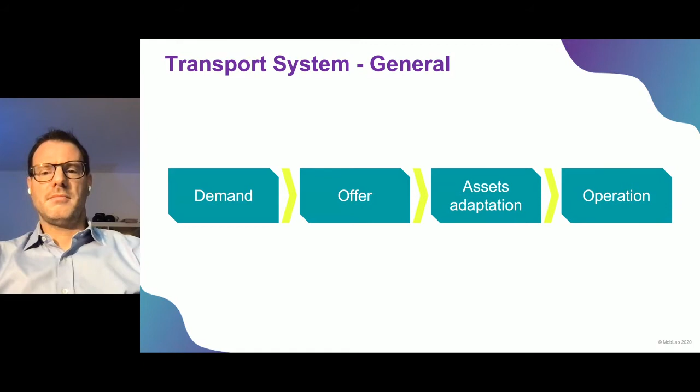Transport system in general, we have a demand - somebody wants to travel. The operator makes an offer. We adapt our assets if necessary, and we go into operation. Pretty simple. However...

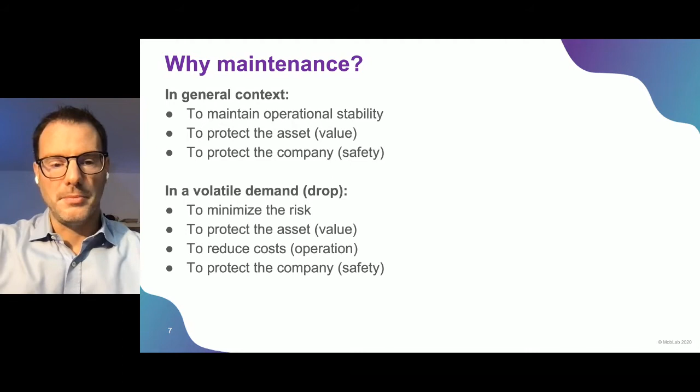Why do we do maintenance? Basically, in general context, to maintain operational stability, to protect the asset, to protect the company on the safety side. At the same time, we have to minimize the risk in a volatile demand, or we have to protect the asset and reduce cost on the operation side if we have a drop in demand, to protect the company as well on the safety side.

The Swiss public transportation - we can go almost anywhere from anywhere at almost every time in one click. All schedules are coordinated. It doesn't matter if you travel by bus, by boat, by tram, or by train. Aviation is not considered part of the public transportation, but the cooperation, feeder, and reciprocal importance of both systems are widely recognized.

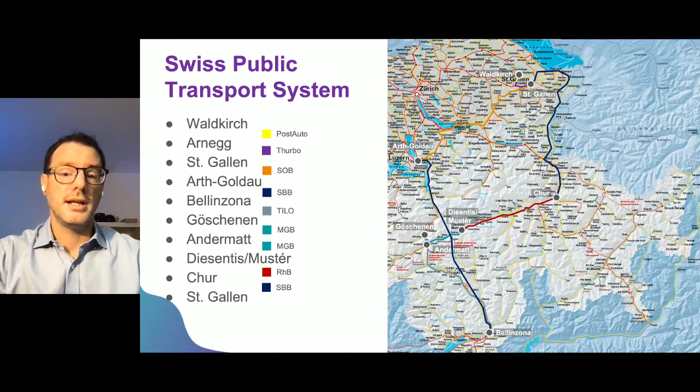Bus operator, Postauto, SOB, SBB, Tilo, which is normal gauge railways, and Matterhorn Gotthard Bahn, Rätische Bahn, which is narrow gauge railways, and again SBB. This basically in one single click gets you your way to travel.

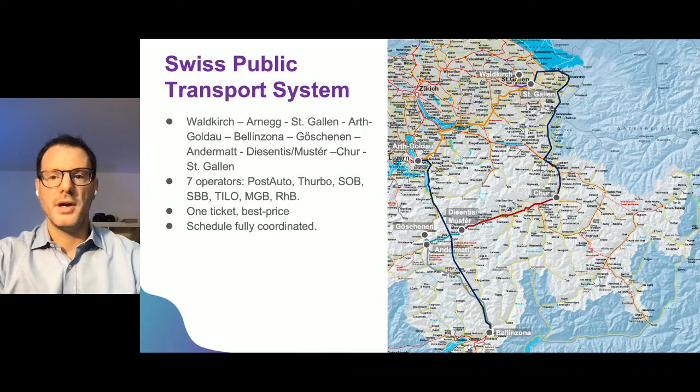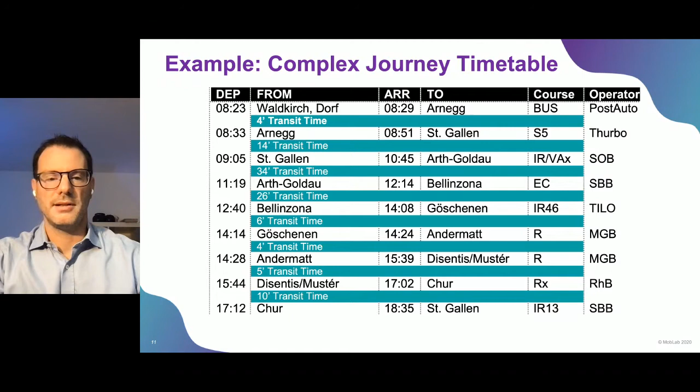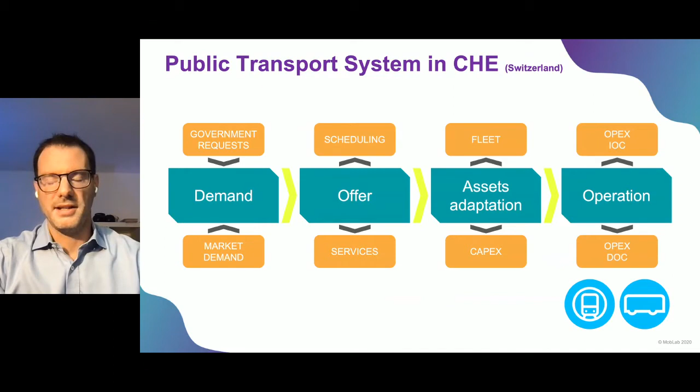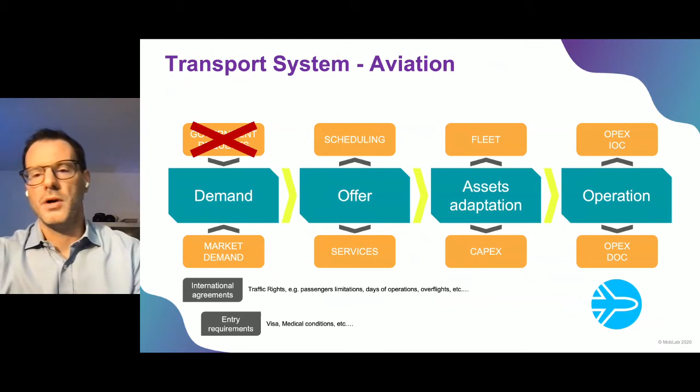The difference between public transportation and aviation is pretty simple. You don't have any government request. The market is fully privatized. You have international agreements, and you have entry requirements, which is now one of the biggest problems in aviation.

Then it picked up again, and we had the financial crisis in 2008. We have a slight drop and then a continuous increase up to last year, or let's say two years ago, to 58 million. What is the situation now?

We are back to 17 million, which means we are back 33 years. In 1987, we had more or less the same amount of passengers.

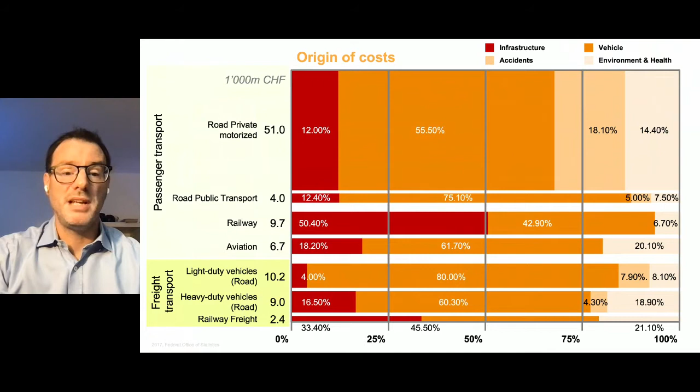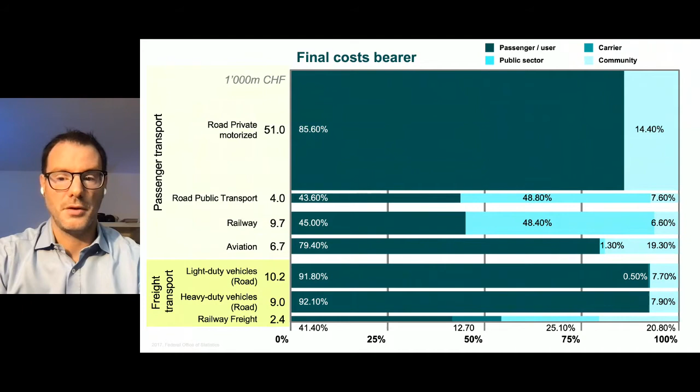We have about 14 billion for public transportation and 7 billion for aviation. Due to the fact that public transportation is subsidized, 50% is covered by the state and the rest is covered by the users. On the other side, aviation has almost no subsidy, 1.3%.

On the public transportation side, you have basically urban and regional which are subsidized, and the long distance which is self-supporting. As I mentioned, the real big drop - the only thing you can do is reduce operation.

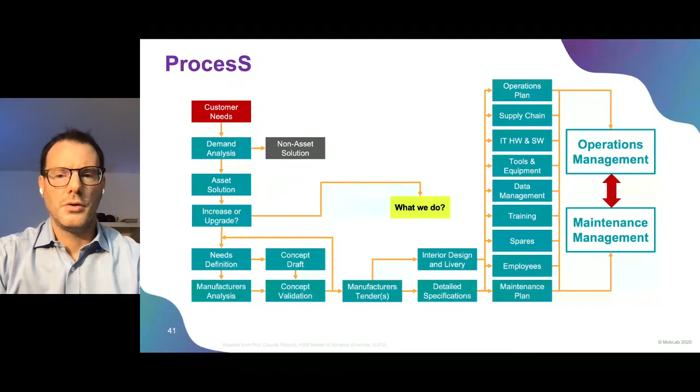I'll go back to this. What we can do, basically, when we need to do something with our assets - on the side, to protect the liquidity, you have a sale possibility because you don't use it, or a sale and lease back. Your long-term storage for return to lessor.

But at the moment, we don't know. We really don't know what we can do because the crisis doesn't allow us to make plans. On the operational side, you have to operate in EBIT neutral operation. That means if you do an operation, it has to be EBIT 0, otherwise you will start increasing your loss.

Supply chain: you have to concentrate locally or selectively reduce your inventory, and so on. Data management: use different scenarios and help with artificial intelligence.

Employee: there is a crossover demand. Some pilots, for example in Switzerland, can now go and use trains, or be trained as a train driver for a limited time.

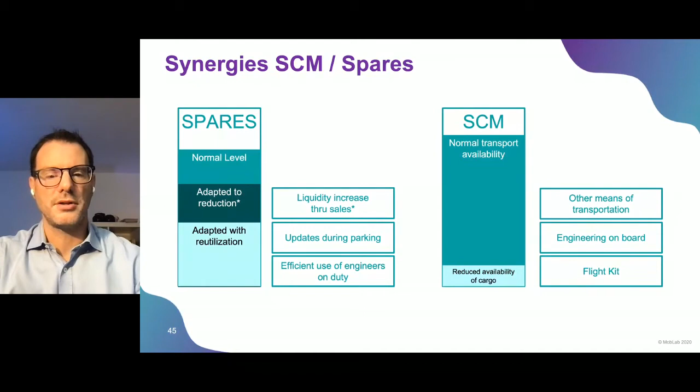Basically, this situation in transportation is pretty dramatic at the moment. And if there is no recovery within few months, we will see possibly a lot of companies going bankrupt.

Basically, act immediately, reduce your exposure in the invested capital as soon as possible if you have the possibility. Cooperate with your partner or former competitor to survive. Give some concession or reinvent your services, and really concentrate on the feasible in this situation. And lesson learned: next time, be prepared.

Don't expect continuous growth all the time, but be prepared for something. Maybe not in this size, but be prepared.

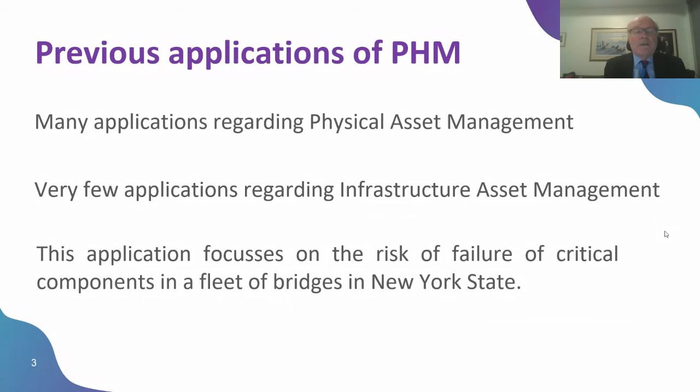This work is done by Gaowei under the supervision of Professor Samarai, to enable optimal maintenance tactics to be identified. We mentioned proportional hazard modeling, PHM. There have been many applications dealing with physical asset management - pumps, gearboxes, diesel engines, and so on - but very few applications of PHM regarding infrastructure asset management. So I'm going to hand over to Gaowei now to speak about the application of PHM dealing with critical components in a fleet of bridges in New York State. Gaowei, over to you.

Thank you, Dr. Jardine. Hello everyone, good morning. Before introducing our approach, let me review the current bridge management approach.

Bridge maintenance management is a trade-off between bridge safety and maintenance costs. As we know, all structures are deteriorating. If a bridge is not well maintained, its condition may get worse and become unacceptable, even collapse. Look at this picture - a bridge collapse in the US in 2007. Obviously, bridge collapse results in a big loss, not only bridge reconstruction costs, but also indirect costs like traffic detour, construction, material damage, and even life loss.

However, spending too much money to guarantee excellent bridge condition is not cost effective. In a state like New York, there might be over 10,000 bridges. Maintaining these bridges is a heavy financial burden for the government.

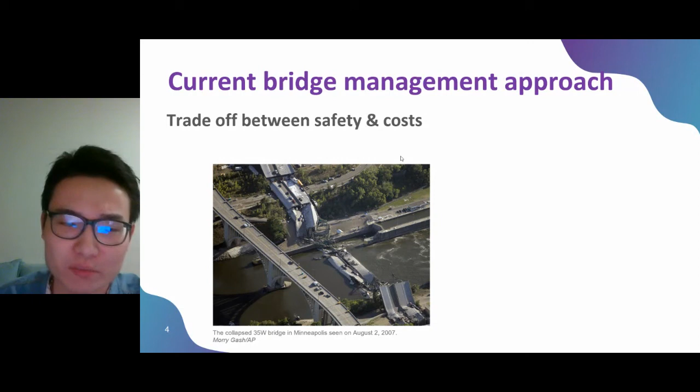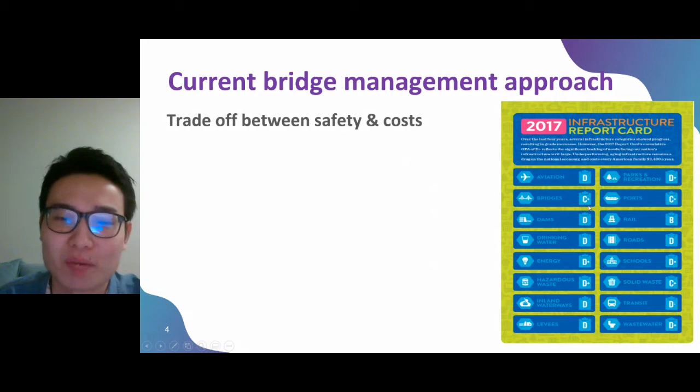This survey shows the current condition of infrastructure in the US. As you can see, the overall condition is disappointing. Bridges have a slightly higher grade, C+, owing to mandated routine inspections and bridge management systems. However, the deterioration models in current bridge management systems have unrealistic assumptions, and fail to exploit the information provided by inspection data as much as possible. So there's still something we can improve.

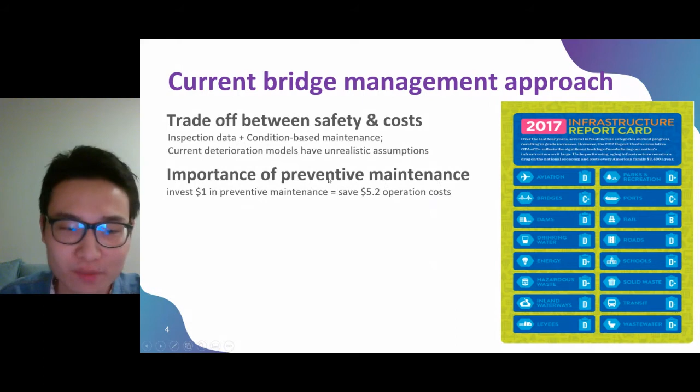People usually underestimate the benefit of preventive maintenance of infrastructure. A previous study indicated that each dollar spent on improvement of the highway system can return $5.2, due to decreased delays, less fuel consumption, and improved safety. So such a topic is very meaningful.

Let me show you some background knowledge about the National Bridge Inventory Database. This is a very huge database, containing routine inspection data for all bridges in the US since 1992. The most important index in the NBI data is condition rating, describing structural condition. For each bridge component, its condition rating is classified from 0 to 9. A higher condition rating means better structural condition.

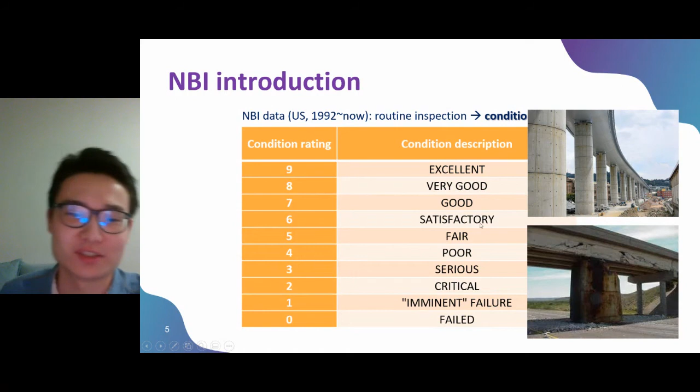Without maintenance, structures deteriorate naturally, so condition rating might drop year by year if no maintenance is done. For this bridge, its deck, superstructure, substructure - all its components - their condition ratings drop gradually over time, like this.

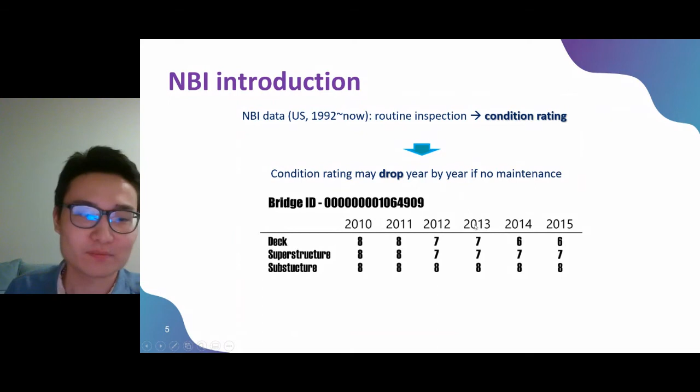Well, we can use the deterioration model to describe the condition rating drops. However, the current bridge management system uses condition ratings only. They don't consider age effect. What is age effect? Well, as we know, like a machine or human beings, older bridges get worse faster than new bridges.

Well, actually, fortunately for the age effect on bridge deterioration, we can actually find it from the NBI data.

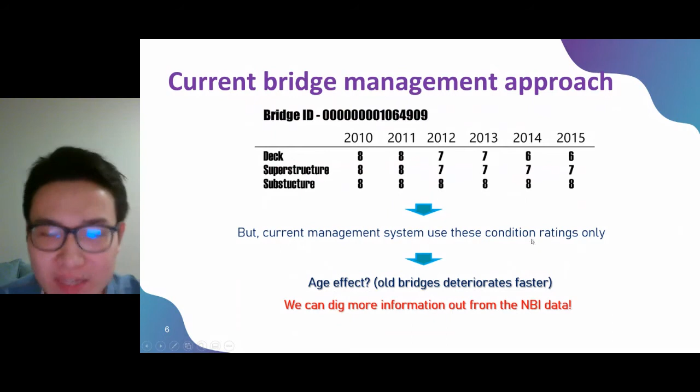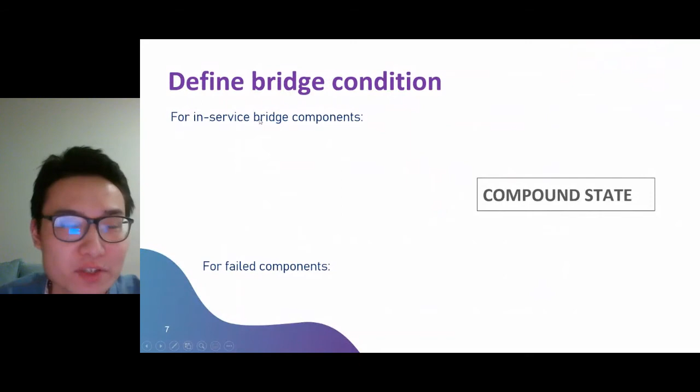Well, in our approach, we create compound states to describe the state of a bridge in its lifetime. There are two classifications. For in-service bridge components, we use 3 variables together to define its state: inspection number, condition rating, and age at the beginning of the planning horizon.

Also, we have a failure state. Well, failure state means the structural condition is unacceptable. It's not necessarily like a bridge collapse. Any unrepairable status can be regarded as a failure. Here, we define condition rating less than 3 as a failure state. For this state, we just use F to denote it.

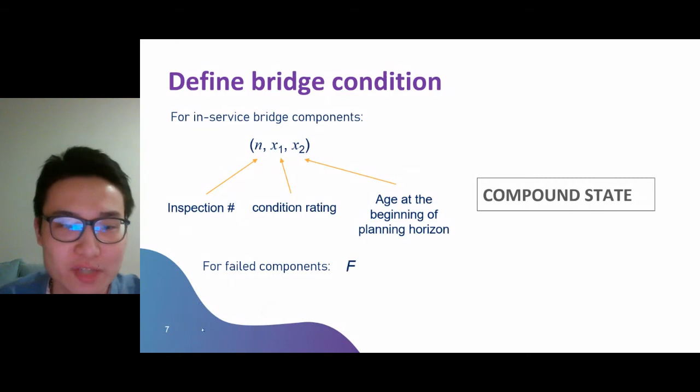So let me give you a small example of how we label compound states for a 20-year-old bridge in a given planning horizon. Well, at the beginning, we have the first inspection. It tells us the structural condition is 7. It's a 20-year-old bridge, so this compound state is 1, 7, 20. Pretty simple.

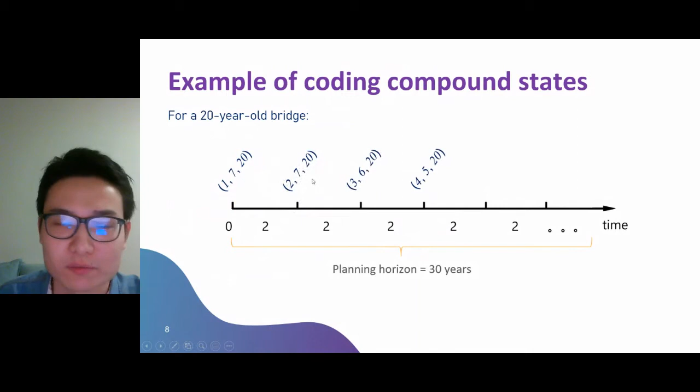So after 2 years, we're going to have the second inspection. It tells us the condition rating is still 7. So we have 2, 7, 20. And with more inspections, we get a series of compound states for this bridge.

Well, let me show you how we incorporate the PHM here, proportional hazard model. As you know, compound states are just like labels. But what people really want to know is the likelihood of a structural failure. In other words, the structural hazard. So we should find a way to combine the 3 parameters in the compound states together to represent structural hazard.

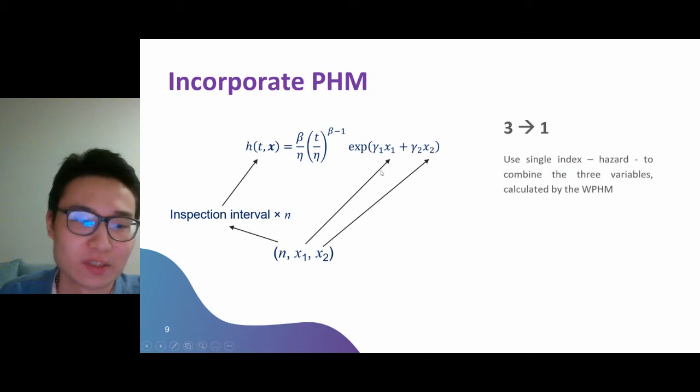That's good. Well, you can also see the condition rating and age, initiation age, are included in the exponential part. And beta is a shape parameter, eta is a scale parameter, and gamma are weights of the covariates.

So this is an example of the WPHM of a bridge deck in New York State. We can easily obtain this model's parameters using maximum likelihood estimation.

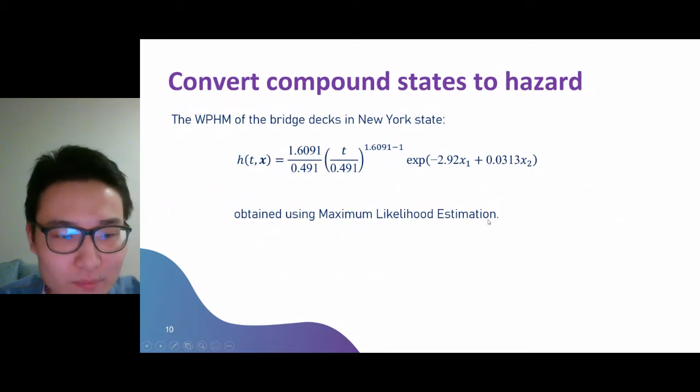Let me give you an example. This is a WPHM of...

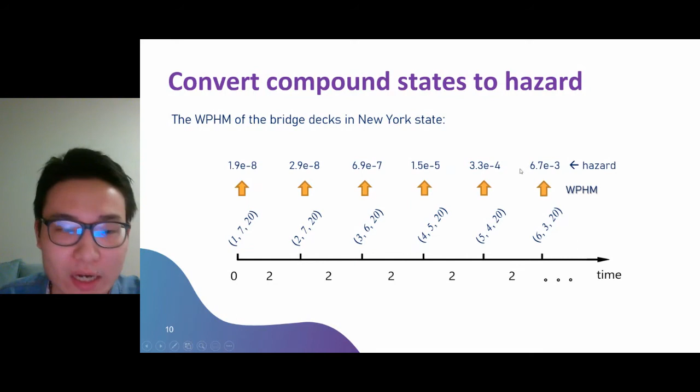Oh, okay. So we determine the maintenance policy based on the hazard of a bridge deck, right? So for bridge decks, we have 2 types of preventive repairs: general repair and essential repair. Well, the major difference between the 2 repairs is essential repair results in higher bridge quality improvement, but it costs much more than general repair.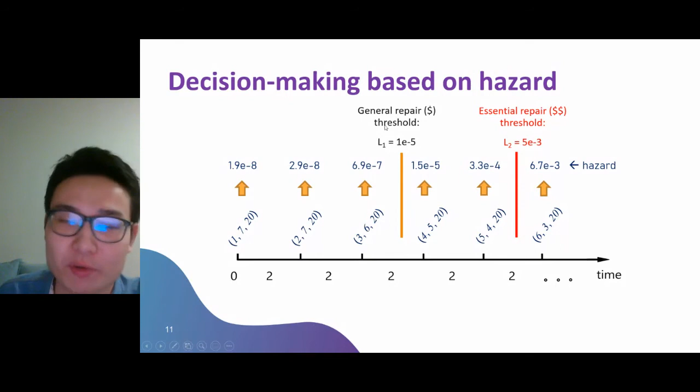For example, for concrete bridge decks, general repair can involve using crack sealer to seal the concrete cracks, because sealing these cracks can prevent water and air from penetrating into the concrete, which leads to corrosion. Well, essential repair can be patching decks using new concrete.

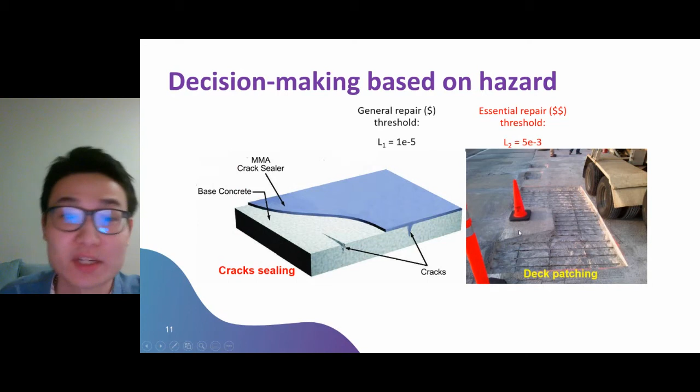To find the optimal solution in this study, I use Markov decision process to get the 2 hazard thresholds.

Sorry, you have about 2 minutes. We have a lot of questions for you. Okay, just wrap up. The presentation will be available for all, and yeah, no problem. I just have, because you are jumping from slide to slide, it's difficult to follow you. Okay, thank you. Okay.

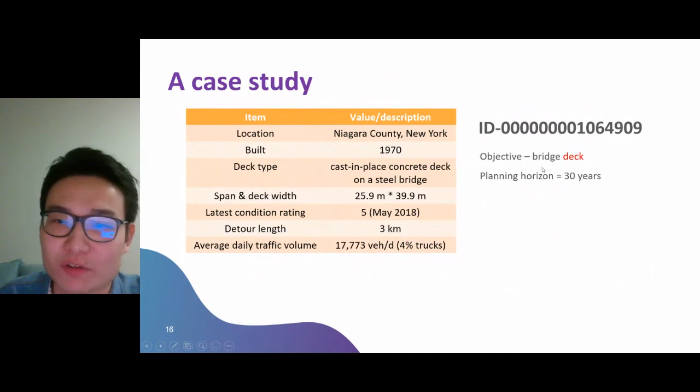Let's go on. So finally, I'm going to share a case study. So for this bridge, well, this is basic information about this bridge, and our task is to find the optimal maintenance policy for the bridge deck in the next 30 years.

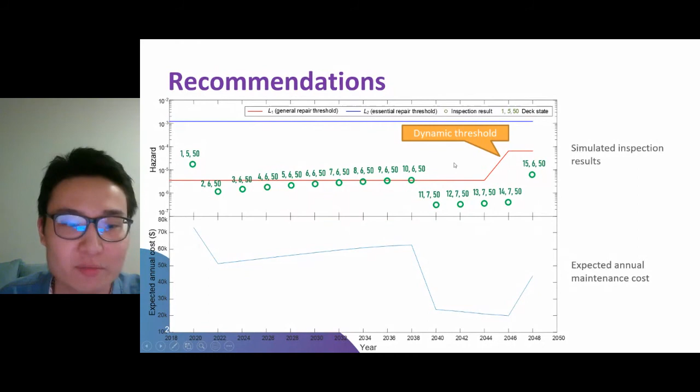Okay, this is the last slide, so I will tell you how to expand our model from one bridge to a bridge fleet. Using our method for each bridge, we can obtain the maintenance cost for each component - bridge deck, superstructure, and substructure - while using different WPH models.

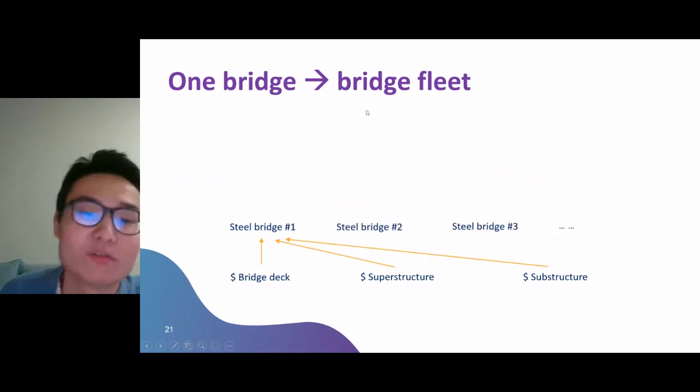So we will get the cost for one bridge, and repeat the same procedure for all similar bridges in a bridge fleet, and finally summarize the maintenance cost for all kinds of bridges in a bridge fleet, and we'll get the total budget for this bridge fleet. So basically it's a bottom-up approach.

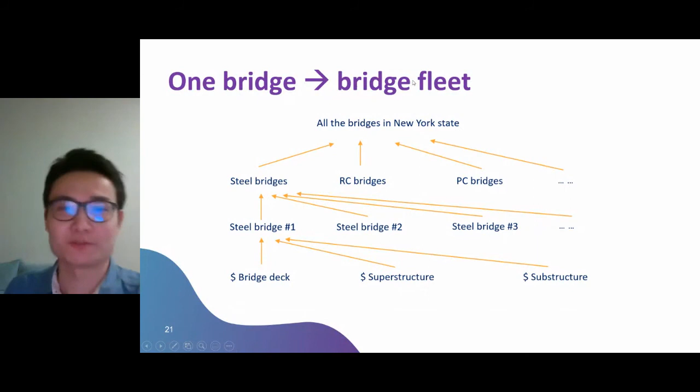Thank you. I think we have some questions. Let me see if I can see them here. Oh, can you this?

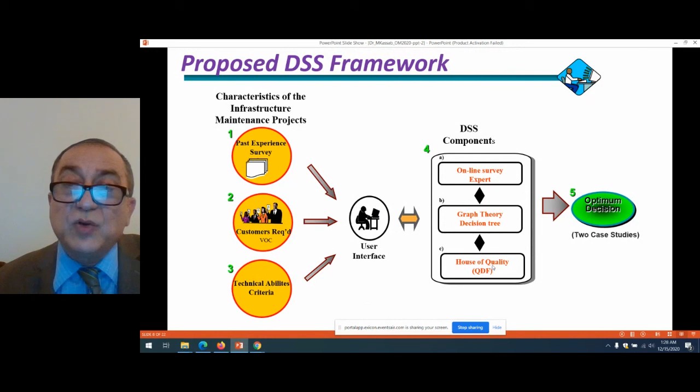Yes, okay, so in this, if you go back, I'm just talking about the decision support system. It consists of three elements which have to be collected from the beginning: past experience about the contractor and survey collected, and senior management. Also we have another input, customer requirement, which is voice of customer - in this case the municipality - what they require for the project, and the technical ability criteria, which is the contractor's ability to take the maintenance project. All this information is utilized by the decision support system, which combines it with graph theory and decision tree, and also utilizes the house of quality approach, and based on this we get the optimum decision for the maintenance project.

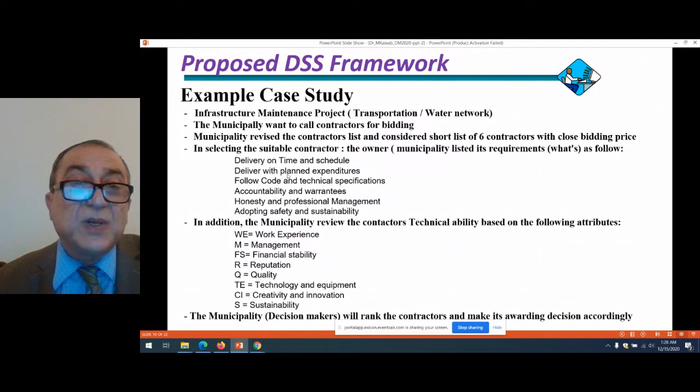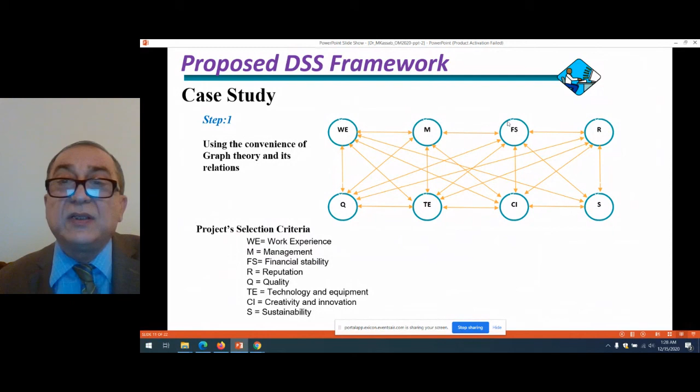Here is a case study in which I put a small project, and these are the requirements by the municipality for the project. These are the contractor abilities, and the system starts by drawing using the graph theory. We draw the project criteria and their weights, the importance of their weights. Here is the interrelation between the weights of the criteria, and here I put the contractor ability weights and their importance.

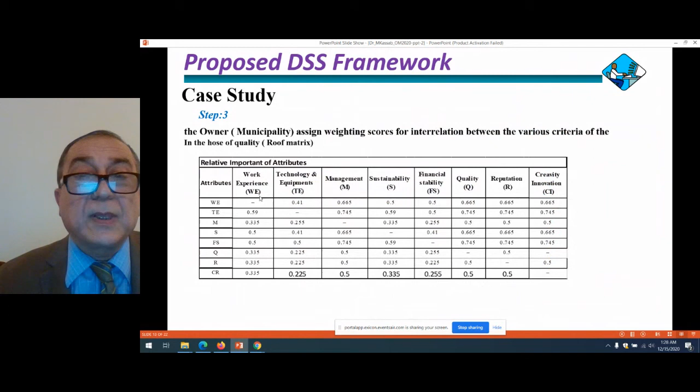So this is - can you - sorry Dr. Moustafa, they're going to close on... yeah, just this, because they are closing up. So in conclusion, I talk about the infrastructure aging and the challenges facing...